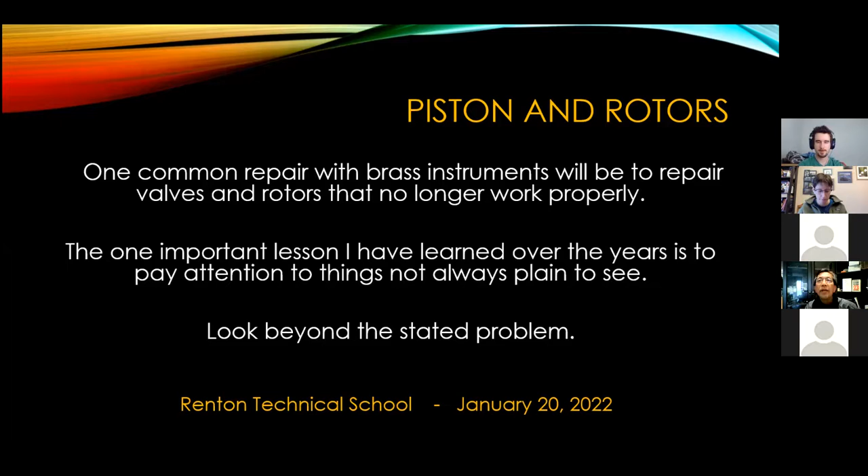Okay, let's start with valves and rotors, specifically valves. If a valve is not working, what are some of the reasons a valve will stop working? You can put that in the chat, or just shout it out. We got casing dents mentioned, not clean, got stuck, foreign object - those are all correct answers.

One thing I know when dealing with valve problems - it's one thing to fix the problem, but you also need to diagnose it where everything is clean, because dirt and everything else hinders your observation about what's going on. So when somebody brings me an instrument and a valve isn't functioning, one of the first things I do is clean that instrument so I can test the piston dry, with no oil. Oil sometimes hides a problem or makes something that hangs up a tiny bit seem to work flawlessly, but if it's dry, you'll feel the drag in the piston. That's why it's important to clean the instrument and check everything out while it's dry.

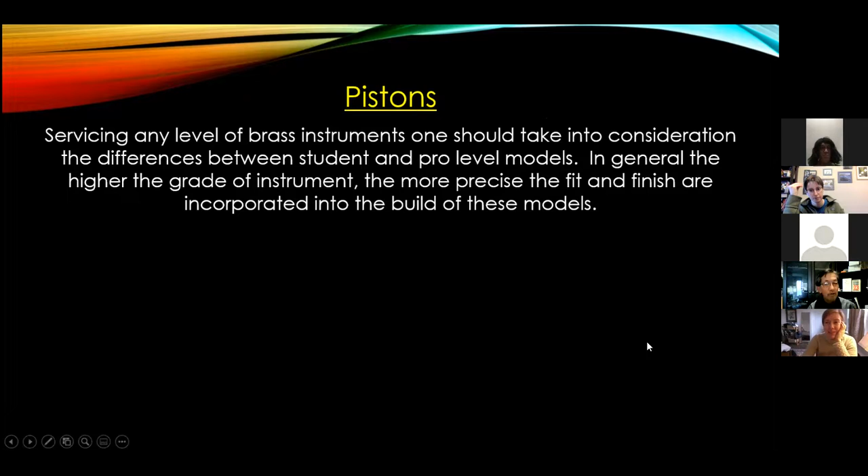Now let's see - do you guys know how much difference there is between the outside diameter of a piston and the inside diameter of the casing it fits into? Anybody want to take a guess? About a thousandth. Perfect, that's exactly right. So what does that mean? 1/1000th of an inch difference. So if this piston is 664 thousandths diameter, the casing is 665.

So basically what that's telling you, the space on either side, or around the piston, is 1/2,000th of an inch. It's not a lot, so it doesn't take much to get a small ding or dent in the casing, or they drop their trumpet and crush the bottom of the threads for the piston to hang up. So that's very little space, and why that's important has to do with how the instrument works.

You would think if you overlapped or made the casing really big, the piston should work even better because there's so much space. But the exact opposite actually happens. If there's too much space, the piston going down is fine, but on its way back it can tilt this tiny bit and then it stutters. So overlapping is not a benefit to you.

Using the right lapping compound is essential, and we'll get into that in a bit. Lapping compounds come in different grits or abrasive sizes. The correct size for, let's say, a professional trumpet is about 1100 grit. Anything coarser is only very slightly too large for that space. I want to use a compound that fits in that 1/2000th of space around the piston. I hope that makes sense.

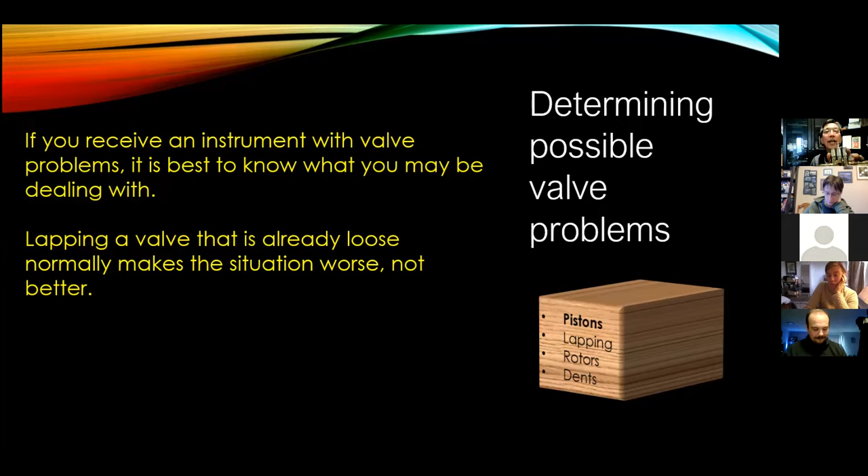So I just want you guys to know that, to save yourself personally some grief from a customer, because nothing's worse—like I said, after you touch it, you inherit everything about that instrument. So it becomes your problem, or your boss's problem.

So know this. This is where, in rebuilding valves over the years—and I sat down one time and counted—most of the valves I rebuilt, and this is not to throw the Bach company under the bus, I probably rebuilt over 650 sets of Bach trumpet valves in the 24 years that I had my shop.

What that involved was either plating the old pistons up and getting them honed, or you can buy oversized pistons from Bach and fit those in, but you need to have the honing equipment and be able to measure everything. So that's where I've come up with this number of 1/1000th and a half.

In doing all this work, the guys that work for me and myself, when we measured everything, if we found things over 1.5 thousandths, it was time for a valve rebuild, because most times the valve was not reliable for the customer. So I hope that makes sense. It's not that much of a difference - we've gone from 1 thousandth to 1 thousandth and a half of clearance. So it's just a tiny bit of wear.

What kind of happens as the player plays, they tend to pull the piston to one side. So the piston gets tilted and the casing gets worn in an oval. If you think of the cylinder, it gets tipped and then gets this oval pattern inside the casing. That condition contributes to the stuttering or the valves going down - they hang up for half a second, then pop up, and for a playing musician, this is a problem.

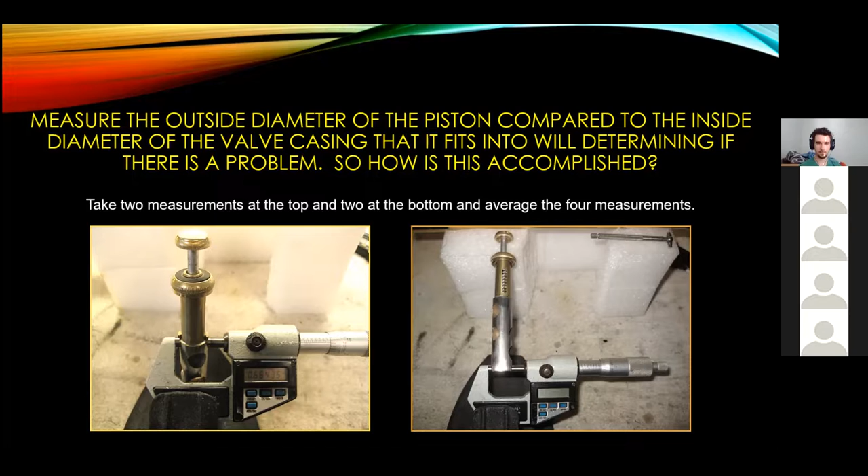Pistons will wear because if you build up debris and things, all the grit that builds up inside of a casing gets embedded into the softer material, held into the softer material, and then starts grinding on the harder material. So the pistons sometimes wear more than the casing.

Does that make sense to you? All that abrasive, all the grit, gets stuck in the soft brass, so it acts like a file or a rasp as this valve is going up and down. All those hard particles are being held in the casing, just grinding the harder material on the piston. So most of the time you get more of the wear on the casing, but pistons definitely wear down too.

Usually, if somebody brings you an instrument that's in that area about 25 to 30 years old, that's where you start seeing a lot of these problems. Not to brag about Yamaha, but in all those years I was rebuilding pistons, I think I rebuilt 3 sets of Yamaha pistons in that same time, and these instruments were just as old. It's only because the Yamaha piston starts out tighter to begin with, so there's a much longer lifespan. It's not like we're doing something superior - we're just starting out tighter.

So you're going to gain a lot more years out of the same age of a piston compared to our good manufacturer competition, Bach. Bach makes good instruments - I'm not trying to say we're doing something better, it's just where you start makes a big difference. So thank you for that question.

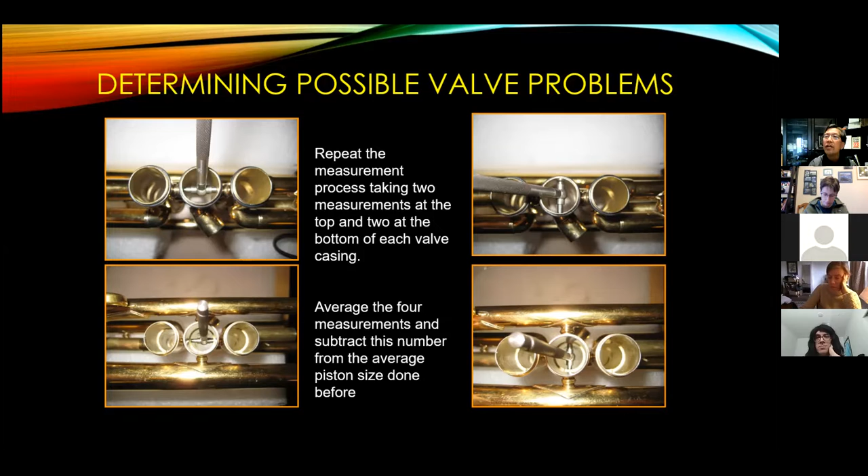And what I do is average all this stuff out. So if I take all my measurements, we're measuring down to the 10 thousandths. Now, you may or may never come across this in your repair life, but if you're working with somebody that's very important and it's critical you get this right, you really need to have the tools.

In this particular example, the difference between the casing and the piston is almost 2 thousandths of an inch clearance. This is a problematic piston that will hang up. When a piston becomes loose, the instrument will still play pretty well, but it doesn't respond as fast and doesn't have as much color. Some guys get used to their instrument being so loose that changing it to something tight again throws their timing off. It takes a player who really knows their instrument a little time to get used to a rebuilt piston.

Unfortunately, it used to be easy to get a set of pistons rebuilt. If you're familiar with Anderson Platers, we used to send pistons there and ask for them to be plated and honed to a specific size, like 665. Anderson stopped doing that about 2.5 years ago, so I don't know where anybody goes now. There are very few shops that can actually rebuild a set of pistons. Osmun Brass out in Boston is one of the only reliable shops I know of, and Steve Winans, Dr. Valve, in the Chicagoland area. Those are about the only two places I know where the work is bulletproof—you can send them there and they'll be done right.

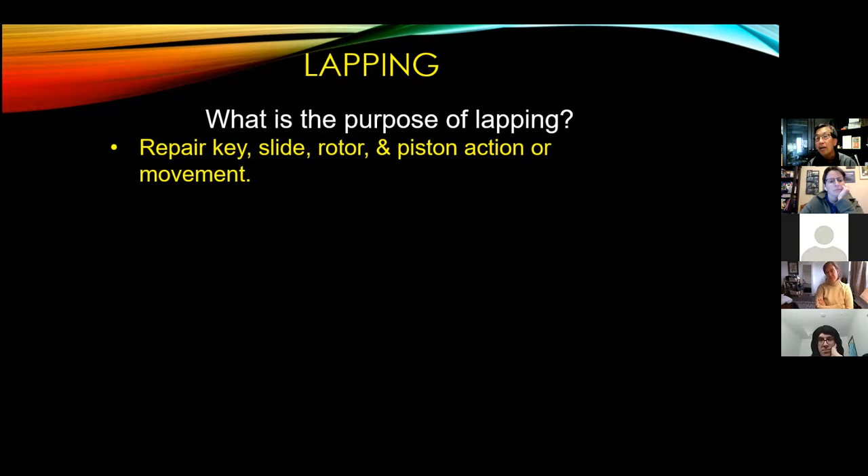I've lapped enough pistons in my life and I still have a lot of garnet lapping compound, so I feel lucky. But I have tried the new stuff and you have less feel about what's going on. That's the thing, knowing that feel as you're lapping - with garnet you knew when you were finished. With the new stuff, you just had to clean it, put it all together, and see if it worked or not.

Okay, purpose of lapping - there were a few things already mentioned, but lapping is a precision tool used to perfect the fitting.

Hey Wayne, I'm sorry, we had a question about silicon carbide, asking if that's glass, if it's like glass.

That I actually do not know the answer to. Silicon carbide, I can tell you this, is used mostly for ferrous metals, steels and things like that. That's where it's used most.

Yeah, that's where I was familiar with it from. I was the one that asked that question. So I was like, isn't that glass type? It's almost like a type of glass. It's very hard and can really eat into things.

Yeah, it is very hard. It doesn't fracture or break down like garnet does, so it stays the same size. With silicon carbide, I think it's to your advantage to use something finer grit than you would normally think to use, because it continues to cut at the same rate no matter how long you're using it, where garnet just kept breaking down into a fine polish.

Silicon carbide - there was one company offering diamond compound, which I just thought was a giant mistake for music. Diamond is unforgiving, it will just cut, and it doesn't give you a margin of safety for yourself in doing valve repair. If you're going to do valve repair, you want to make sure you do a good job and be able to hand back to your customer something that works. You don't want to hand back something where the piston is too loose and it starts to hang up.

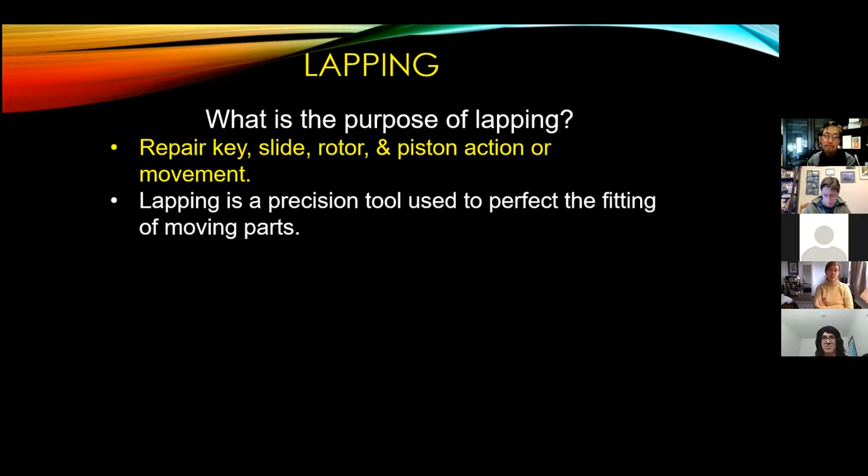One more thing, Wayne - it looks like, I didn't know this, but it looks like Music Medic has a garnet lapping compound available now, which I think is new.

They do have it, and I've tried it. I've been trying to get some information from Kurt, like what's the base. It's one thing to get lapping compound, but the next important thing is being able to clean it out of the instrument. The old garnet and stuff that Hetman products used to sell us, I could clean that out with Dawn dishwashing liquid. So I'm always investigating - okay, this works, but how easy is it to clean this now? Because some of the stuff will get embedded into the metal you're trying to hone, and it's difficult.

You could clean it, put it all together, put some oil on it, and then you pull the piston out, wipe it with a paper towel, and you see all this gray. You haven't got all that abrasive out of there. So I'm still working on Kurt to get more information on that.

So this is, yeah, you're right, this is fairly new with Kurt getting this. And right now I'm investigating another company that used to sell it, but I think they're selling it again - garnet lapping compound. So I'm trying to find out what's going on.

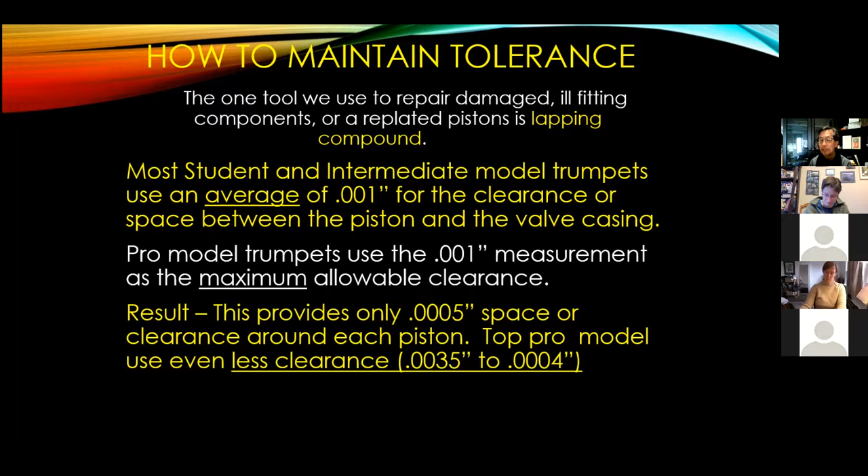A lot of shops you go into, you just don't know what's going to be there until you get there. Sometimes they just hand you a jar of lapping compound and the labels come off, and for all you know it's 700, 600 grit. Yeah, it's going to lap, but it's going to do a lot of material removal at the same time. So just be careful and ask questions about that stuff.

Now, lapping compound - this is from Hetman's products. This is what he suggests for different grits and their purposes. The only thing he didn't take into consideration is, like for Yamaha and Schilkes, how tight our valves are. So I would put our valves at that 11-1200 grit, for final finishing. You guys will have a copy of this.

So there are purposes for all these things. It's no different than sandpaper for wood - you use something coarse to kind of get something close, then get finer and finer to improve the finish or smoothness of the material. Hope that makes sense.

And we've talked about this - trying the problem piston in a good valve casing, and the good piston in the problem casing. So if we discover the piston is the problem, our solution is to put lapping compound on the piston and start lapping. So my question to you is, if this is the problem, why are we lapping this?

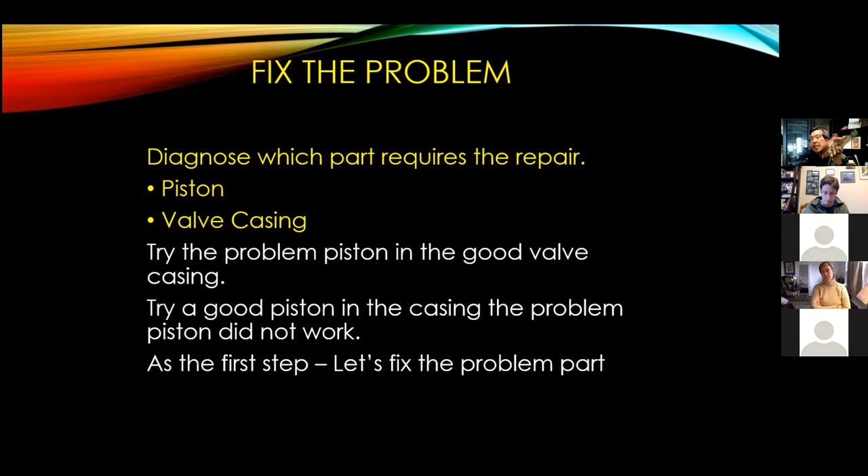I look at this more from a professional standpoint - I'm trying to fix a problem. And if I have to wear something down, I'm going to wear this down. And if this is not the problem, why am I taking material away from a valve casing? So this is where that Ferree's ground sleeve comes in.

If you think about this, these from Ferree's are perfect cylinders, honed right at the correct dimensions. There are no portholes, they're perfectly round. I'm using this as what I'll call a lapping sleeve. I will lap the problem piston in the sleeve, so I know this is perfectly true. I can lap this, and there are a lot of benefits to doing this instead of doing it in the casing.

So if the piston's the problem, let's fix the piston. Our advantages - I target the problem and I'm only taking material away from this. The other thing is I maintain the valve clearance because I'm not taking material away from two different parts. And the biggest thing is, after I get done with this, I just clean the piston. I don't have to clean the casing as well. So from a time standpoint, I'm saving a whole lot of time not cleaning all these materials. Does that make sense?

This is something different - nobody ever taught me this, but in thinking about it, this is the problem, why am I trying to fix or use something that's not broken and not causing the problem? Why am I taking material away from it? So I've come up with this, and it's the same reverse way around.

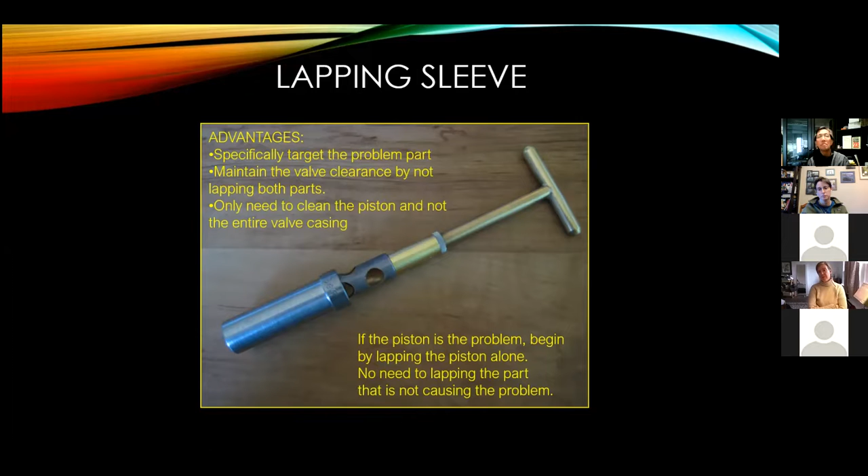So Wayne, somebody did ask what you just covered, which is, can the lapping compound damage the sleeve? Is there a point, you said maybe 500 casings or pistons, but is there anything that can damage that just by lapping? Yeah, I mean for me, I have two of these, same size - one is strictly for dent work and the other is strictly for lapping.

I don't use the same one for both processes, and same with the ground casing sleeve. I have one clean one strictly for lapping, and the other one is for doing dent work. So I have the luxury of having two of everything, or at least for us as a manufacturer, all our pistons are pretty much the same size. So I can afford to have two of these things, but you're right, eventually this does wear.

Yes, no, they're nodding yes. That answers it. I'm sorry? They nodded yes, Wayne. You answered the question.

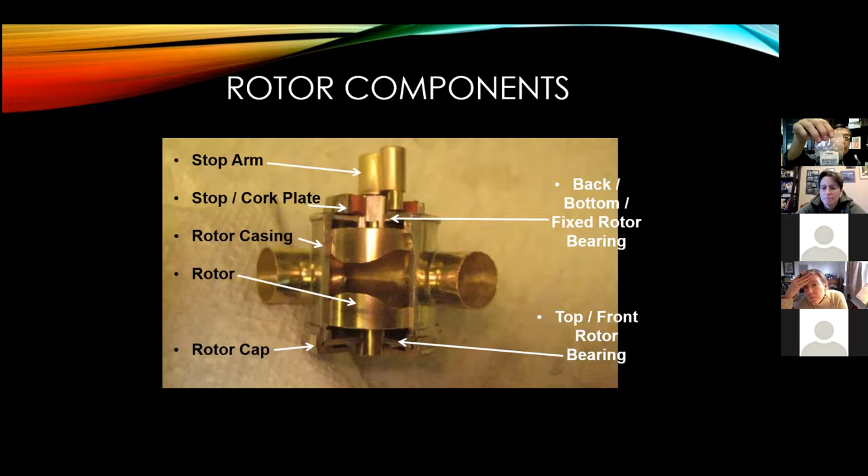One lucky thing about the shop in New York is I don't just work on Yamaha instruments. Myself and my colleague Tomoji Hirokata, who is a world-class woodwind technician, we're the only Yamaha custom shop that actually works on anything and everything. So we see everybody's instruments.

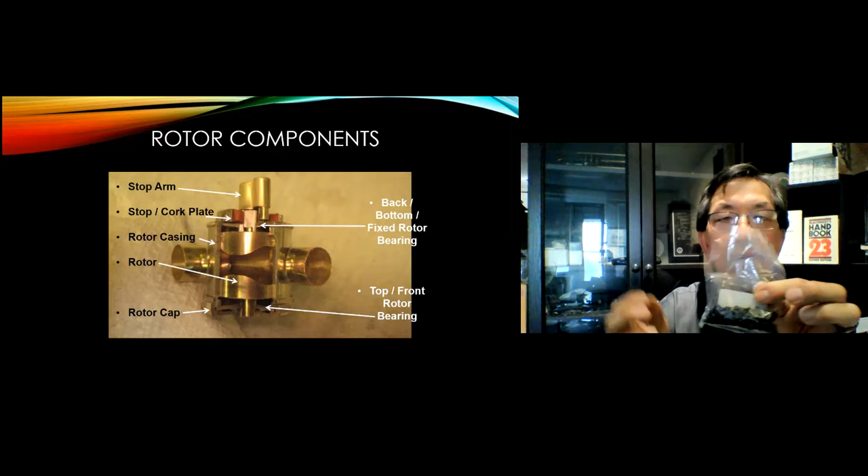This is the only bumper material I use on everything except some large tubas. Whether it's a Conn French horn, a Holton, a Bach trombone, whatever, this bumper material comes pre-cut. The pieces are soft enough that I can almost push them in with my fingernail. They're tough but soft. I've seen this stuff 20 years old and it's not hard as a rock, unlike some Buna rubber products that harden when exposed to certain rotor oils. I don't know if you can see the order number, but this is what I'd tell you to use.

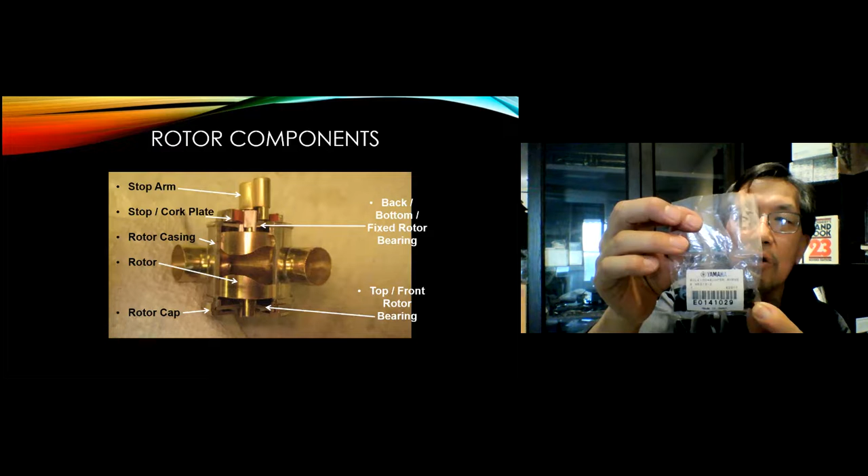It's real easy to work with, and this stuff lasts forever. It saved me trying to figure out tricks to get it installed in the plates themselves.

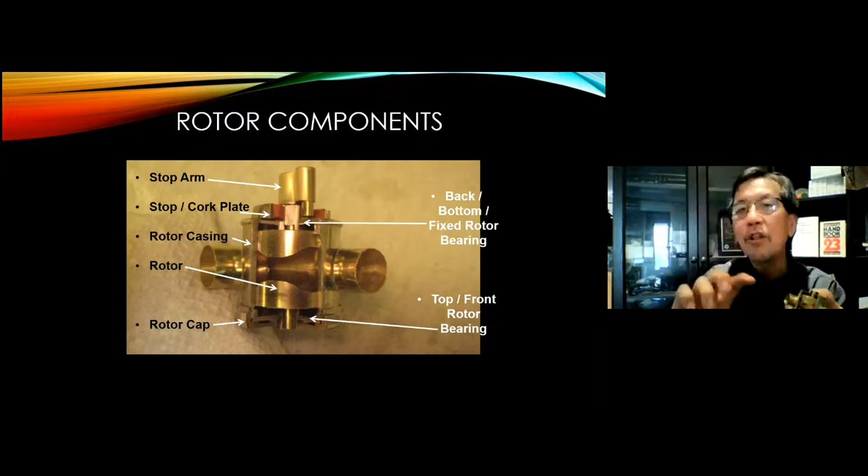Jessica, can I ask you a question? Yeah, I'm here. When you do rotors, what do you guys cover? The reason I'm asking is what I've got in my PowerPoint gets pretty heavy into rotors, covering end play and side play and tightening, and I don't want to start covering stuff that a lot of techs won't even be doing.

So we actually make a tool instead of using a steel punch to get the rotors out, and we made a bearing plate tool. But we go over how to take apart the instrument, how to wash it properly with that special brush to get the rotor casings clean, and how to string rotors, although I do have a mechanical link rotor well soon to be on order.

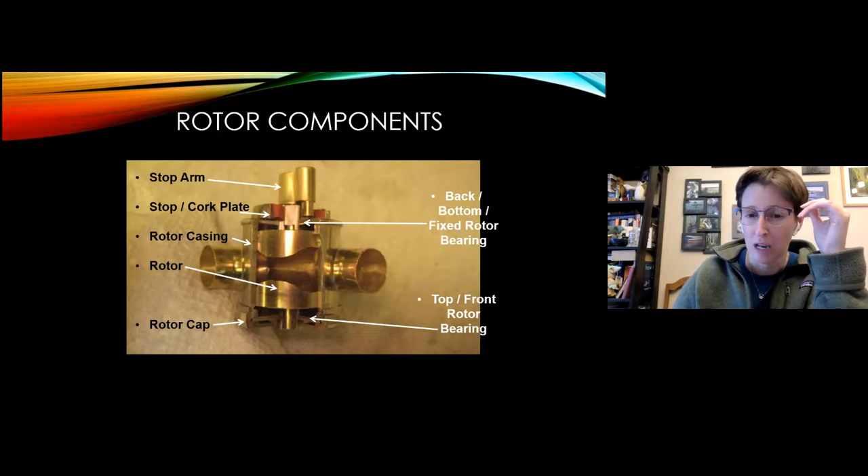Do you ever show how to tighten a bearing? Yeah, we do get into rotor valve fitting. I have a colleague who worked with Orpheo for a while, so he got Orpheo's whole system of how he tightens rotors with collet swedgers around the stem and the top, and also how to alter the bearing plate so it sits in there without any slop. But we don't do that until February, and we might not get into the actual rotor fitting stuff until third quarter depending on how things play out, so we haven't touched a French horn or a rotor yet.

Okay, I'm going to go through this lightly, and if somebody wants to ask questions, please do. What I'm covering is that rotors wear over time, just like a piston wears the casing over time. A rotor wears inside the casing, and I want to show you what wears and where the problems exist.

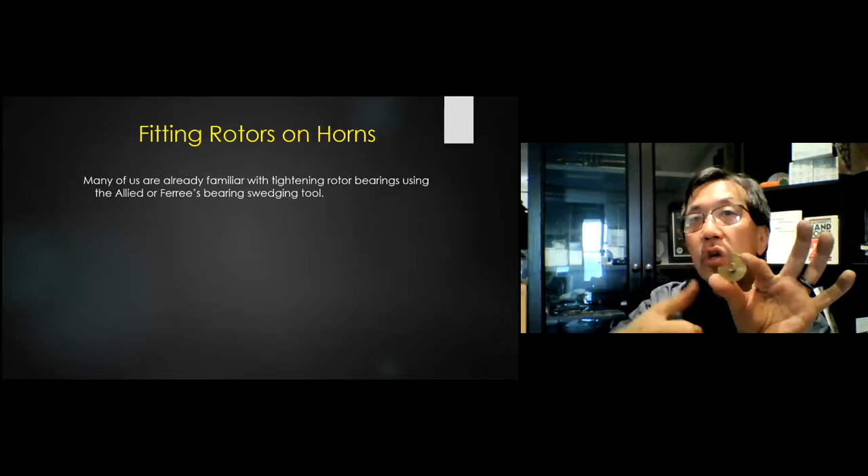Most of you will get familiar with what's called the rotor bearing swedging tool. That's a collet tool. Basically, this part of the bearing gets loose and you swedge it closed, much like swedging a woodwind key where you squeeze it and reduce the center on top of the rotor to get it tight inside there again.

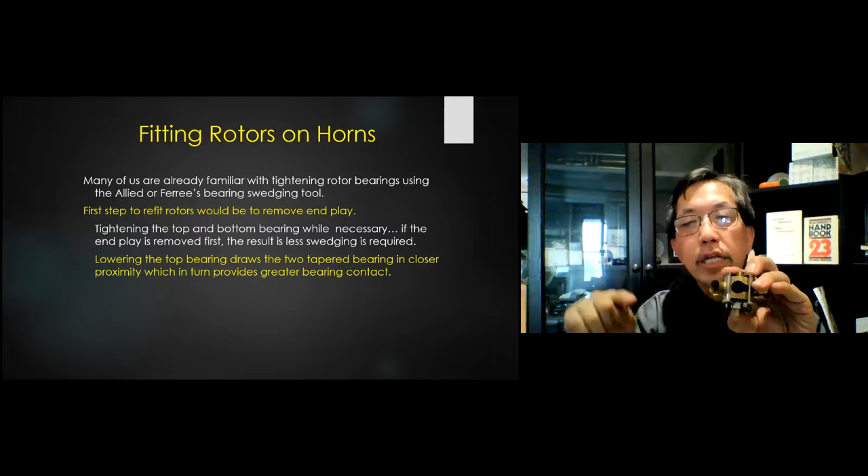My first step is to remove what I'll call end play. Over time, a rotor starts to move up and down, partly because when a lever or string linkage moves the rotor, it tilts it like this, so the hole gets worn in an oval pattern. This is the reason we have to tighten.

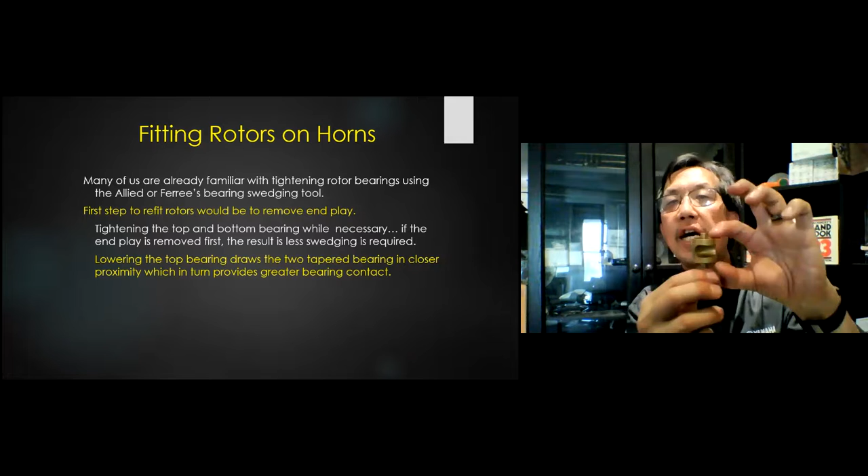Also, a rotor has a bearing surface on each end, and over time those wear so the rotor can actually start to move up and down. I think it's more important that we remove this end play.

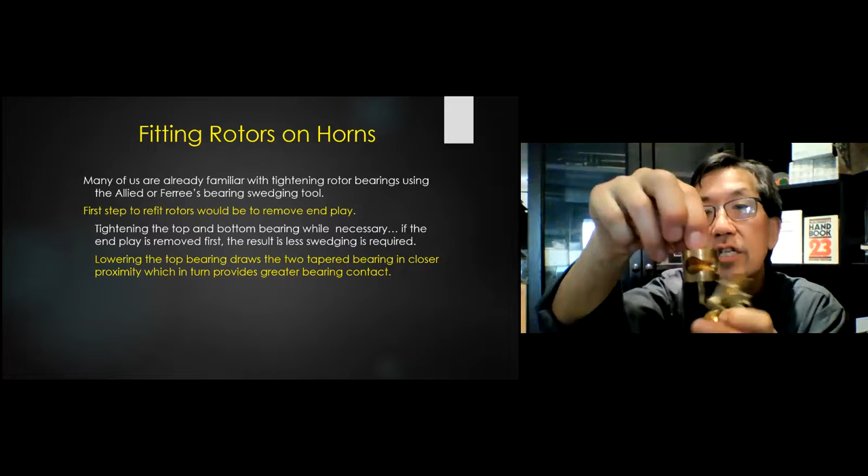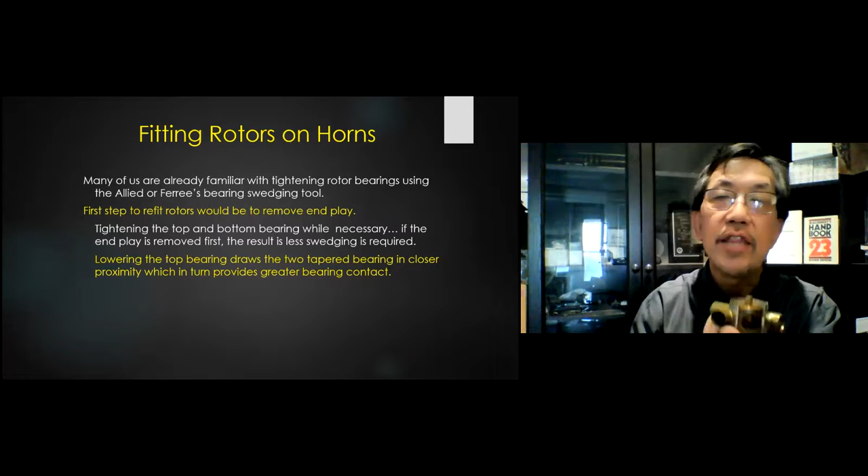One thing you might not know is that most rotors, or just about all of them except for Texas Conn 8Ds, are tapered on the outside rather than a perfect cylinder. So the casing is tapered also. When this fits, if the rotor can move up and down, the two tapers move away from each other and create a big gap where the rotor leaks air in the closed position. That's why I'm talking in this PowerPoint about removing up and down play.

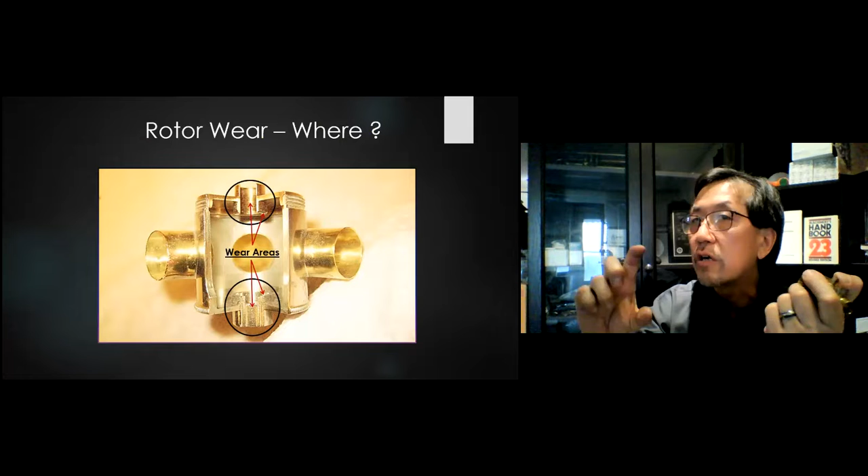So hang on a second, here's a rotor. These are two spots where we get quite a bit of wear, because this is where the spindle on each end of the rotor spins. Naturally, this is where you're going to get wear. You'll also get wear on the inside ends on both sides - that's where you get that up and down play. Now, how I approach this is a little bit different.

Let's see. The spindle itself and the bearing - wow, I should do this better. The spindle and what it fits into down here are also tapered.

Now, in this picture, you see where I have that black circle. If I surface that, meaning take the material away, it allows this rotor to drop down a little bit more, so this taper fits better into the taper that's in the bearing below. I hope that makes sense.

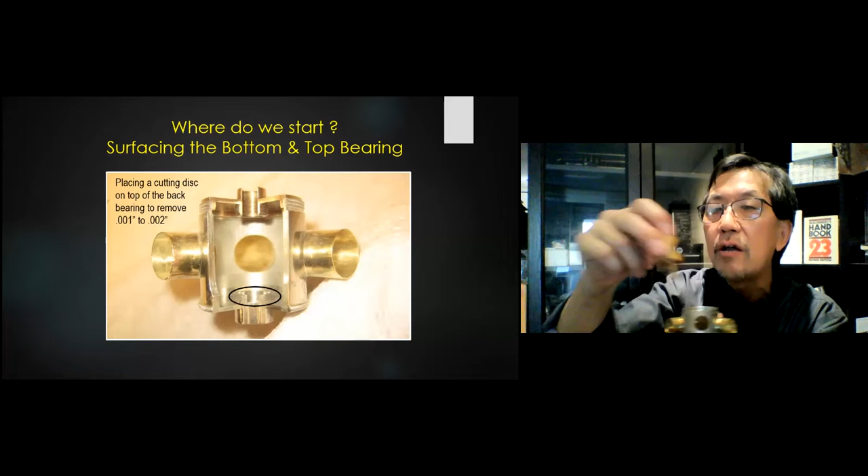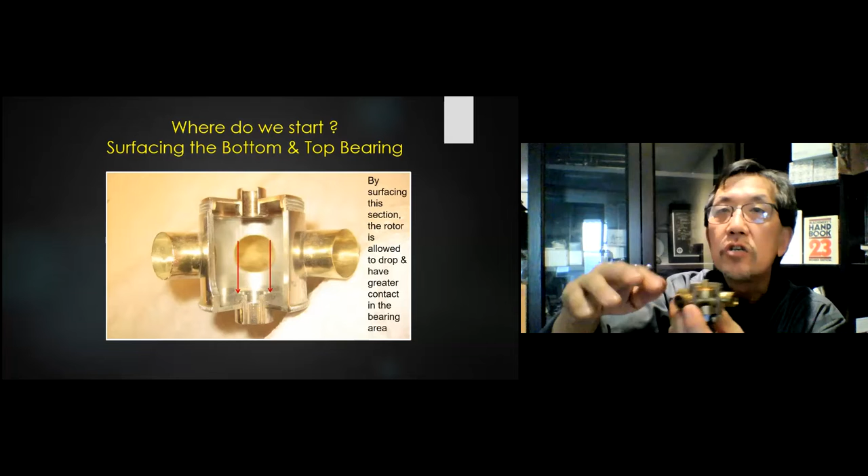I don't know too many guys who do rotor repairs that actually do this, but I am surfacing that part of the rotor casing to allow the rotor to drop down, to get this taper to fit better in the taper that's in the bearing below. I'm talking about maybe a thousandth of an inch, a thousandth and a half. It's enough to return the tightness of those two tapers.

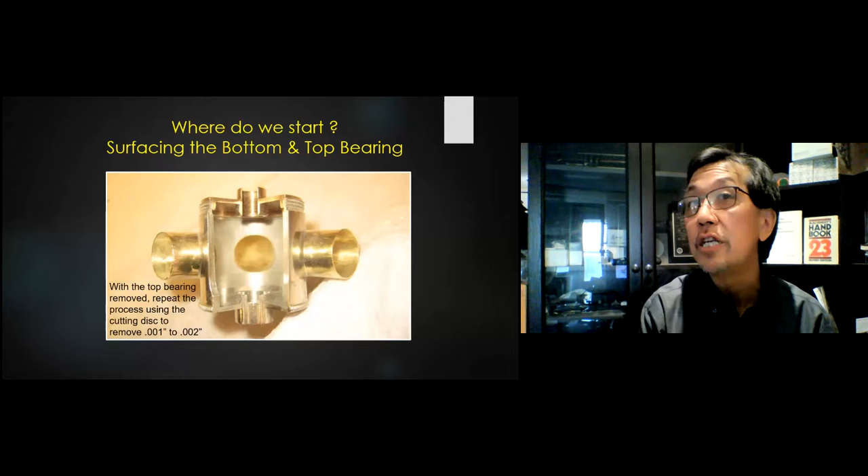Now let's see, right here, removing a thousandth to two thousandths - it's not a lot. You need some specialty tools that you can buy. I think JL Smith makes a flute tone hole leveling disc for the Trill Key tone holes. You can use that to basically surface the bottom of that rotor casing bearing top spot, which allows the rotor to drop down and tighten the taper.

Yes. There was a question about the general ratio of tapers - 1 in X ratio of tapers. What do you mean? I'm not sure what it means.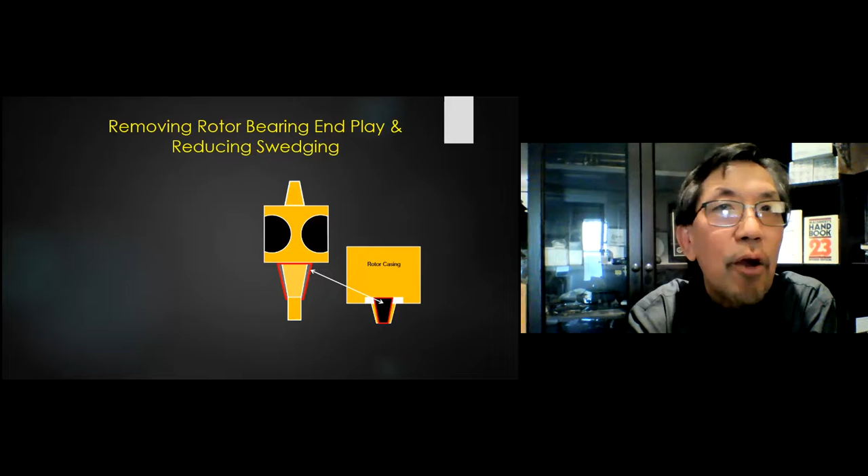Sophia, would you like to? Well, a lot of times when I see tapers, they're listed as 1 in X, like a 1 in 14 taper, which would obviously be narrower or shallower than a different ratio. All the different manufacturers have their own unique proprietary shape, so there's not a single answer to your question. Does that make sense? Yep, our standard lack of standardization - they do not use the same taper. Some are even proprietary and don't really align to anything on anybody's chart. So I know that's not really answering your question, but that's the reality of what every manufacturer does. Some of it's unique to the instrument itself, so they've just come up with their own version of things. I hope that answers your question. Pretty much - it's kind of like the only thing that's standard around here is the complete lack of standardization.

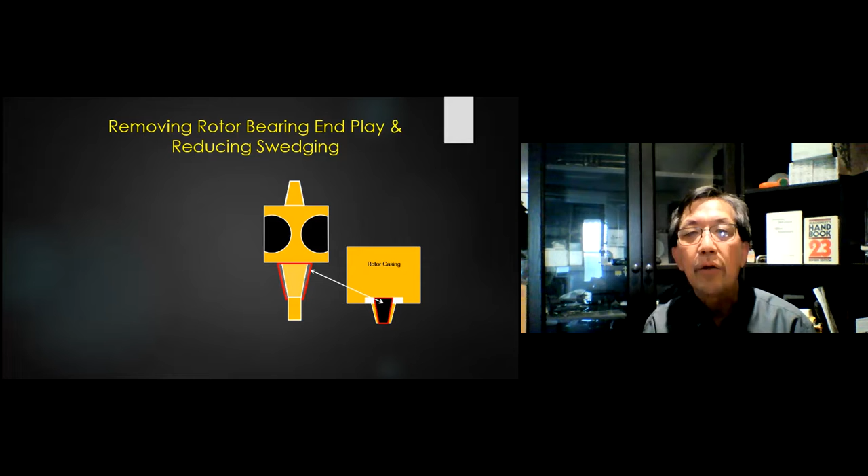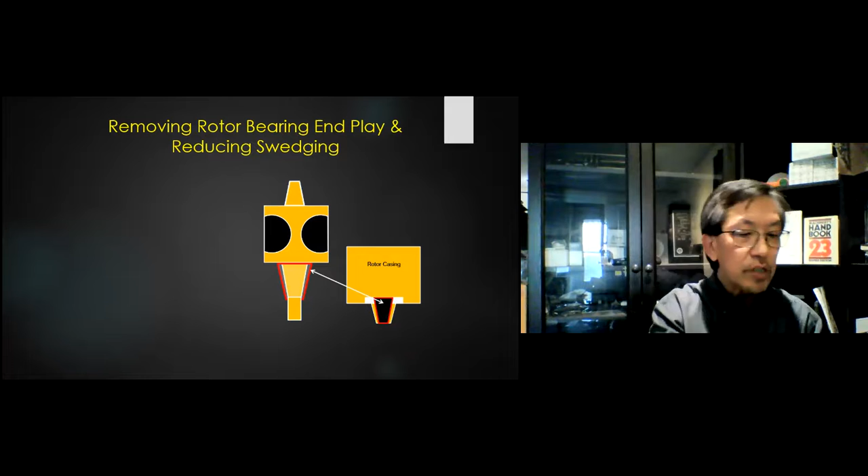What I'm showing in this diagram, the picture of the rotor with that red outline, is showing the bearing surface and how much space there is. It represents what's in the bottom of the rotor casing, what I call the bottom bearing. This removable one I call the top bearing. Different manufacturers have different names for either end, but the fixed bearing I call the bottom. When the bottom one wears, I show you why I lap this one surface - where that blue line is, that's what I'm surfacing. If I remove a thousandth, a thousandth and a half, or two thousandths, it allows the rotor to drop in and this taper to become tighter. I hope this visualization helps explain why I'm doing this.

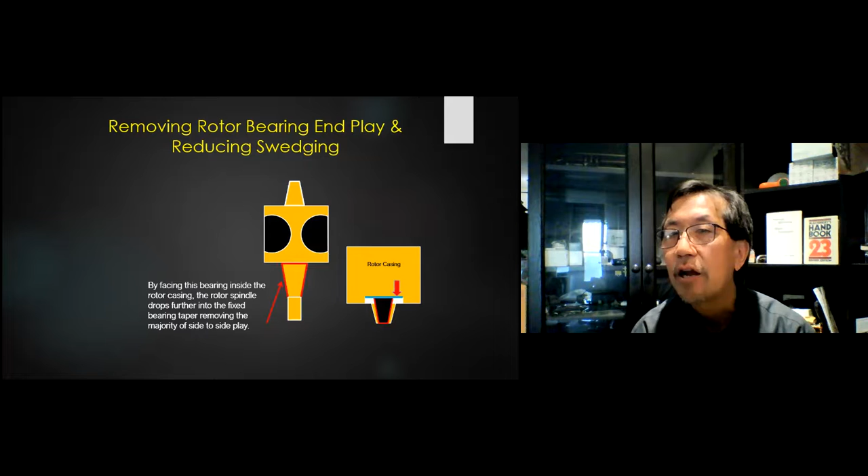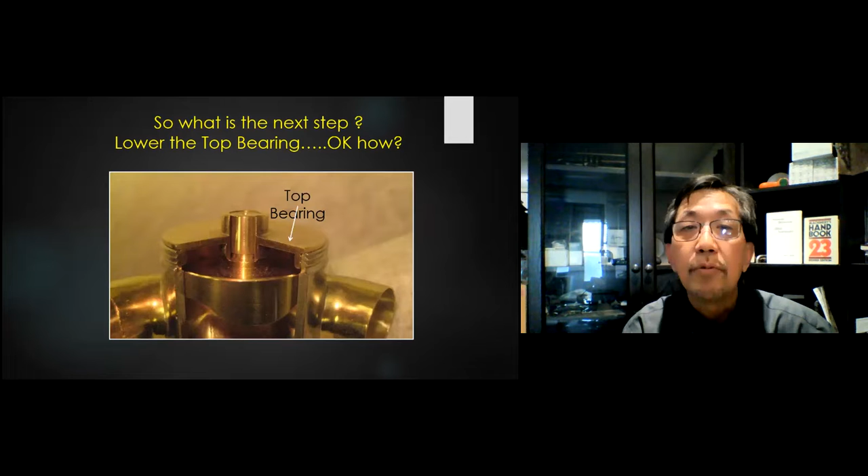So that takes care of the bottom bearing. For the top bearing, to get that closer, I'm going to machine or abrade the top of the rotor casing. You can either put the bearing in a lathe and machine the underside of the top bearing, but you need a decent lathe that'll spin that rotor bearing concentrically. That's the problem - a lot of shops have decent lathes, but getting something to spin concentrically that was made on a different machine isn't always possible. I hope that makes sense.

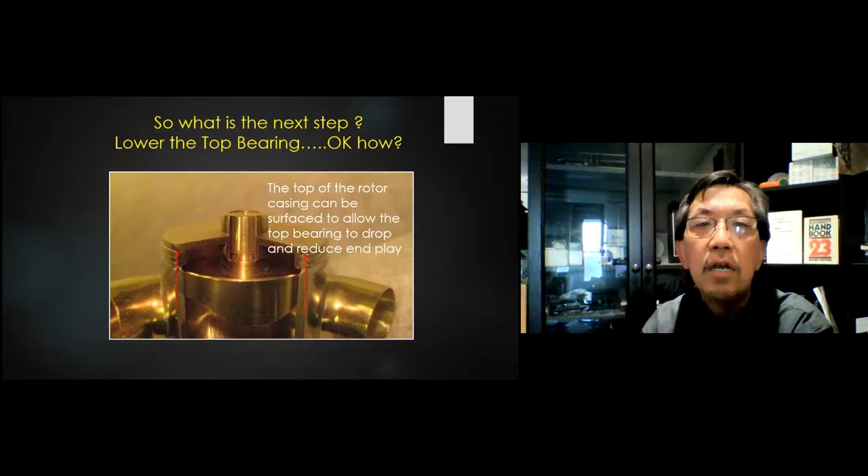So the easier thing to do is take a thousandth off the top of the rotor casing. This can be surfaced to allow the top bearing to drop, which helps reduce the end play. There are plenty of rotary sax tone hole tools that will do this job - Ferree's, JL Smith, everybody's selling these discs to surface tone holes. You can use the same type of tool with one of the pilots to take a tiny bit off the casing itself.

So in doing that, I can drop down. Now, I don't know if Ed Kraus still sells this tool. Mr. Kraus has gotten out of selling a lot of different things. This tool only existed because I asked him to make this, so if he still sells it, I am unclear. I don't think he does. He's really trying to pare back on tools, and if he does, he has like one set left, but I really don't think he does. He's really trying to just focus on pads and bumper material and stuff like that. As a substitute, any of the sax tone hole tools that you find, you can use those, as long as you have some kind of pilot to keep the abrasives centered in the rotor casing.

Wayne, we have a lathe question. Sophia, can you go ahead and unmute and ask your question? Yeah.

So if you got a 4-jaw chuck for your lathe, shouldn't you be able to set it up to turn concentrically if you're using a 4-jaw independent? Because I know 3-jaw automatic self-centering chucks rarely ever center. I got a lot of experience and background using these things, so I immediately thought 4-jaw chuck, you can. Yes, if you have a 4-jaw chuck and a dial indicator, you could dial this in to spin dead center. Not many shops are going to have a 4-jaw chuck, even if they have a lathe. I will put that out there. Oh, okay. Yeah, I mean, it's either that or there are 6-jaw chucks where the entire chuck can be adjusted. It's kind of like that 4-chuck idea, but instead of moving the jaw, you're moving the entire chuck. And I used to have a small 6-jaw on my small Logan lathe that I could dial anything in to be dead center. So yeah.

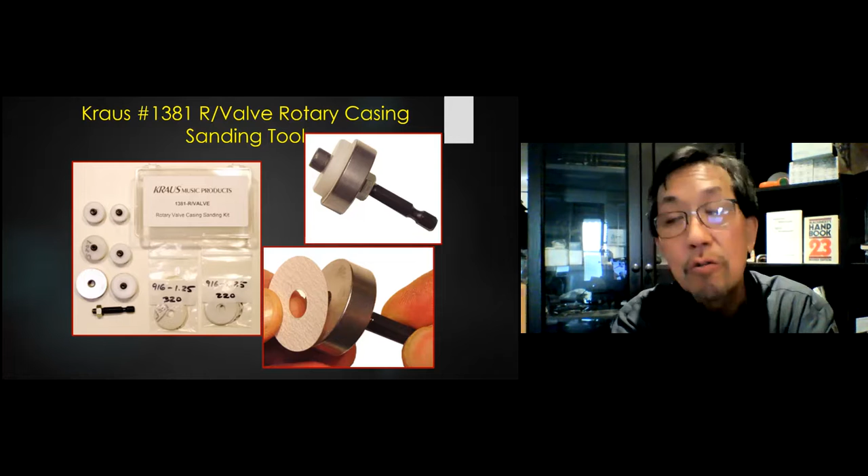Hey, I don't mean to cut in here, but I can't have this meeting go till 2 because I have to jump to another meeting at like 1:45. Okay, so we have not gotten any French horn stuff as far as this goes. I'm not trying to rush, just saying if we could maybe get out of this and move this along a lot faster and get into dent land. Sorry, everybody. Okay, thank you.

All right. Before we get into dents, do you guys want to take a short break? Do anything you'd like. I'm good, straight on, just keep going.

All right, I'm going to try to make this quick. Thank you guys for hanging in there, we've been here a while. I'll try to make this quick. A lot of the things I'm going to talk about with dent work is what I'm calling unconventional dent removal. I'm sure you guys have had your share of putting dent rods, dent balls, all these different tools to remove dents. I'm going to show you a few different things, or different ways of thinking about things.

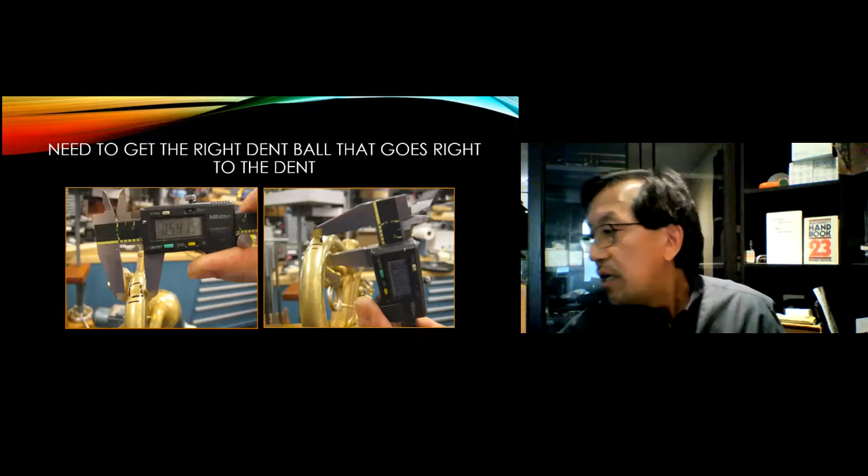All right, how do we figure out how to pick the dent ball that's going to go right there without going through 5, 6, 7 different dent balls? Okay. The way I would do this is measuring. Now, there's a way to do this by measuring. In this example, you can see I'm measuring the crook of a trumpet bell. One direction, it's 541 and almost 542. The other direction, it's 510. There's this huge difference here.

Like 30 thousandths of an inch. And why is that? Whenever you bend something, this direction gets more narrow than this direction, or the diameter gets wider in the bend. It's a natural occurrence - even if you fill it, it's hard to get a perfect cylindrical bend. This is a normal example of when a bell is bent, there could be this much difference. It's not a perfect cylinder. That's why sometimes when you're taking dents out of the crook of the bell, you're tapping and feel like you're right on the dent ball, then you get to the side and you're not. This is one of the reasons - it's wider one way than the other.

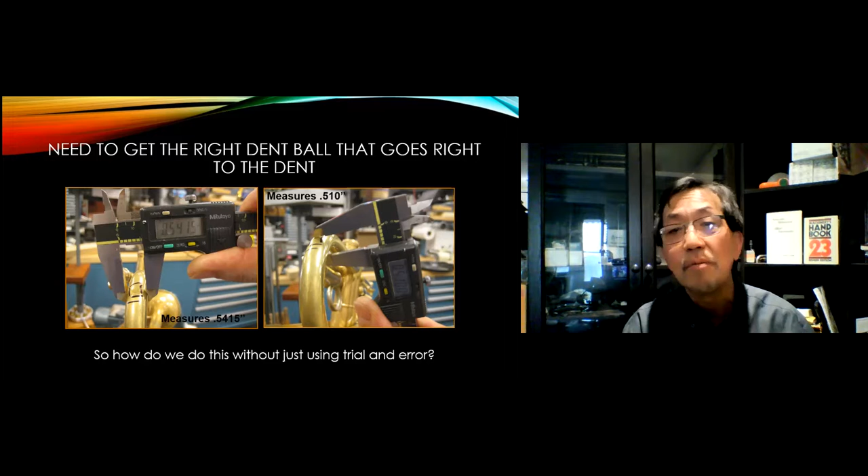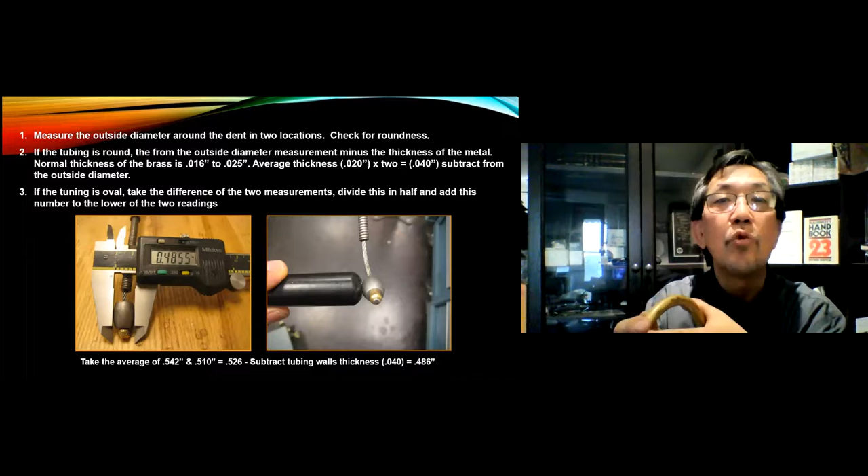But the reason we're measuring this becomes clearer in a second. 541, 510 - so we got a difference of about 30 thousandths of an inch. If we measure the diameter and average it out, we come to about 525. Now what do I do with that number? The thickness of metal used in brass instruments is somewhere between 16 to 25 thousandths. So how does that help me? If I know the outside diameter and minus two thicknesses - a thickness on either side of the dent ball - I can pretty much guess, within one dent ball, the right one that'll go right under that dent I'm targeting. So if our average is around 525, I'll average the thickness at about 20 thousandths.

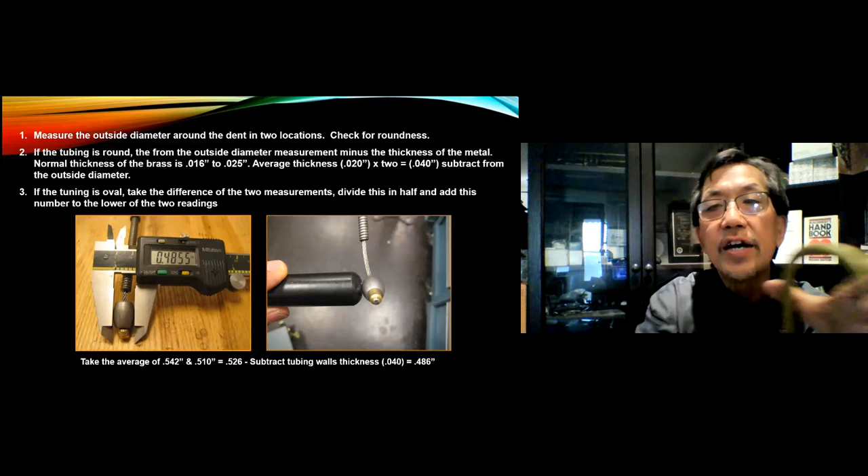So if there's two sides to that, I'll minus 40 from that diameter I measured. So I come up with 485 here. Now that dent ball should go right under that dent without you guessing. You'll either be right underneath the dent or within one dent ball of it. So this is one way to figure out how to get the right dent ball exactly under that pesky little dent.

Okay, I'm going to interrupt you, Wayne. To the students - I've been in this industry since 2008, and this is the first time I've heard this. You want to write this down and put it in your back pocket, because this would have saved me an incredible amount of time throughout my entire career. This might be my favorite piece of information I've received in a long time.

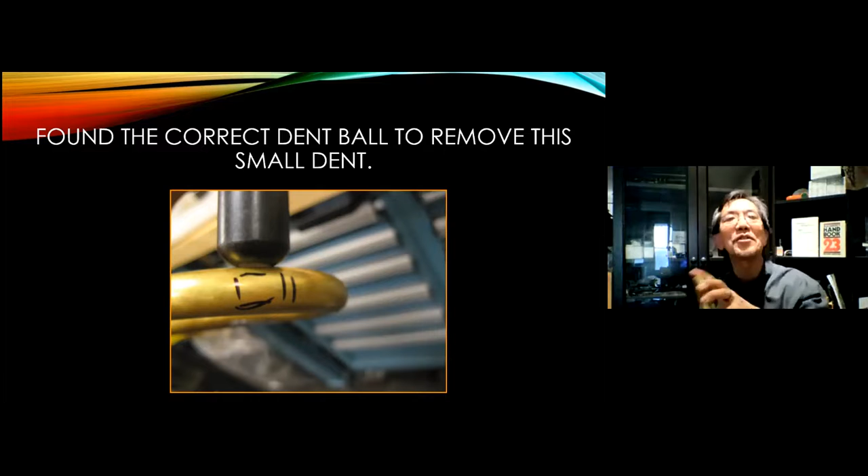This is one of those things - I was just sitting there one day with a pesky customer and a brand new instrument, trying to do as little as possible, not to create more work, or put as few things inside the instrument, because this person was very particular about everything. So I sat down and figured this out, thinking, wait a minute, I know the average thickness of the metal - can I use this information? I sat down and figured this out, and I was surprised that the first time off, I actually picked the dent ball that went right underneath the dent.

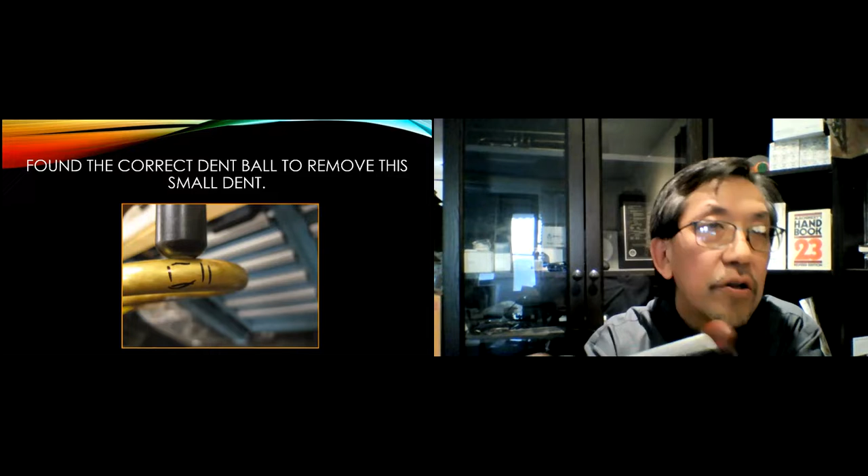Now, in saying all that, are you guys familiar with all my dent hammers? I have them coated with something - this hard red plastic that Ed Krause used to sell. It's a plastic or ultra high molecular weight sheet that's self-adhesive, that Votaw, I think, still sells. All my hammers - I do not use a plain steel hammer. I do not like Delrin hammers. I never have - I don't think there's enough weight to impact a dent properly. But I've had this same red plastic on the hammer for the last 5 years. It hasn't come off. You can hit as hard as you want and never leave a hammer mark. So on silver, on brass, whatever, I can do all this work and you don't get any hammer marks. That's part of how I avoid leaving marks, because my goal is to make it look like I was never there. That's hard sometimes, depending on the dent.

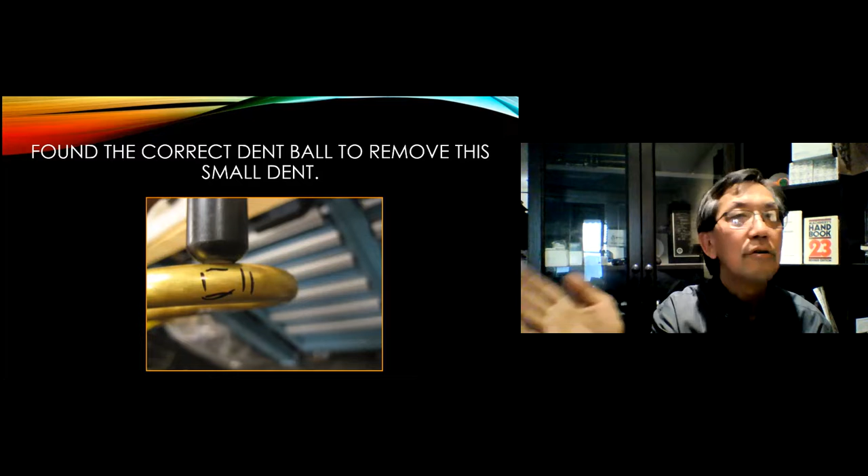But figuring this out helps with dents here, and the other instrument I really don't like working on for taking out dents is flugelhorns. Flugelhorn branches and bells have a constant taper, so you get one dent ball that goes right where you want it, and the next one goes way past where you need it. So you have to get very creative sometimes to figure out how to get a dent ball exactly where you need it.

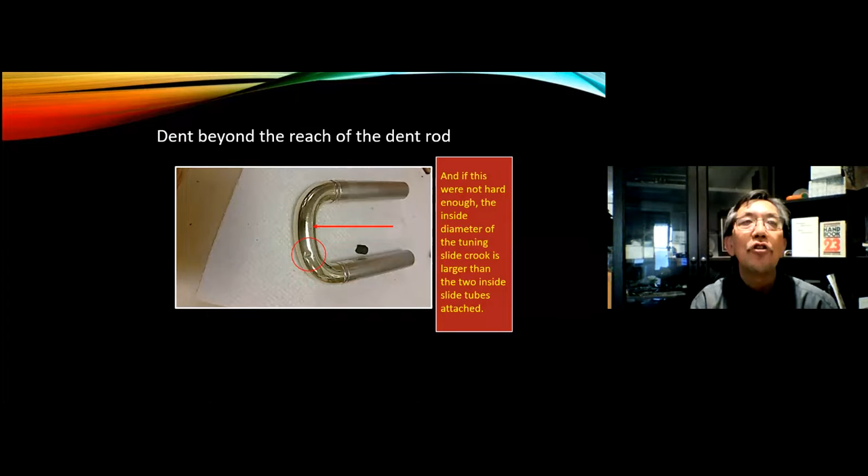Okay, moving on. Here, this seems simple enough, but no dent rod reaches this. So what are our choices? The customer wants this dent out. Well, our only choice is to take this apart. Or do we? And to make this worse, if you put a dent ball in the tubes, the crook inside diameter is actually larger than the tubes attached to it. So you can only get so big of a dent ball in there.

All right, here's my solution. Basically, you can put the largest dent ball that you have inside there, with a magnet, a rare earth magnet inside this tube. If the ball is loose enough and you can get underneath the dent, you tap this, and even though the ball is loose, that tap makes the ball drop away and then pop back to the magnet. So every time you tap, the ball is going away, coming back, and hammering back up at you. You can take that dent out this way, using a ball that's actually a dent ball that's too small.

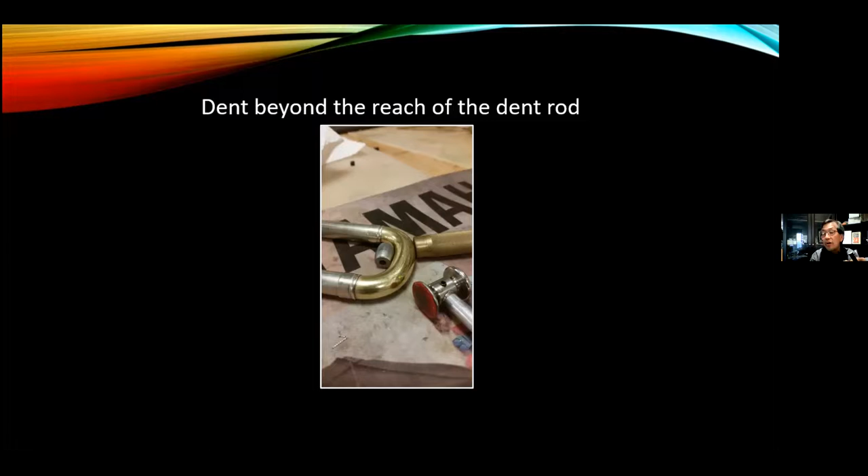So here I am with my tool, tapping on this, and that's the end result. I got the dent out.

Now, what I'll tell you is this sounds easy, but it is painfully slow. You'll be tapping and think you're doing absolutely nothing, or maybe even doing more damage. You'll be tapping going, man, nothing's happening. But if you do it long enough, you'll start to see the dent come out and get smoother and smoother. Then you learn to move the magnet back and forth, covering more of an area as you're tapping. But you can take that dent out without having to take it apart. I got the dent out.

It comes really handy on a lot of the large tubas that have really soft crooks. You can take out a whole lot of stuff that you cannot reach with a dent rod.

This was the customer's French horn, and they wanted it, they were actually waiting. I said, well, give me a few minutes here. It took me about 15 minutes to take that tiny dent out using a magnet and a dent ball inside.

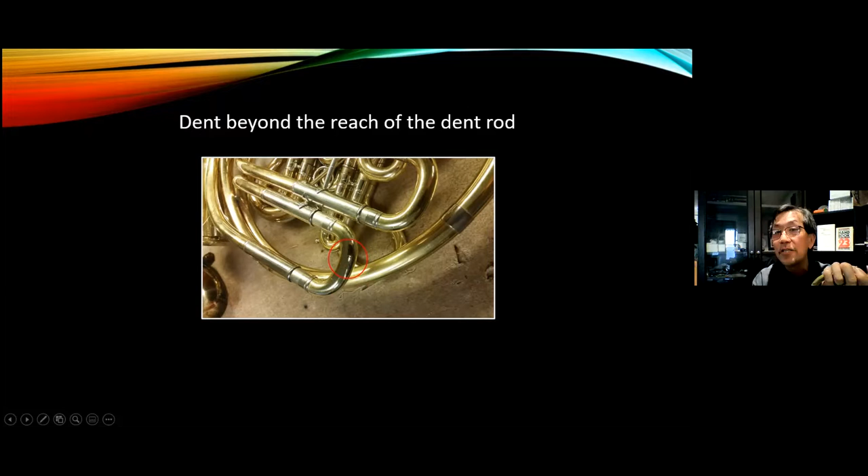Let me show you another example. This is a euphonium. There's no way you can get a knuckle tool or a dent rod to this dent. Same thing, I found the largest dent ball that would fit in there, attracted it with my magnet, tapped on it, and got the dent out.

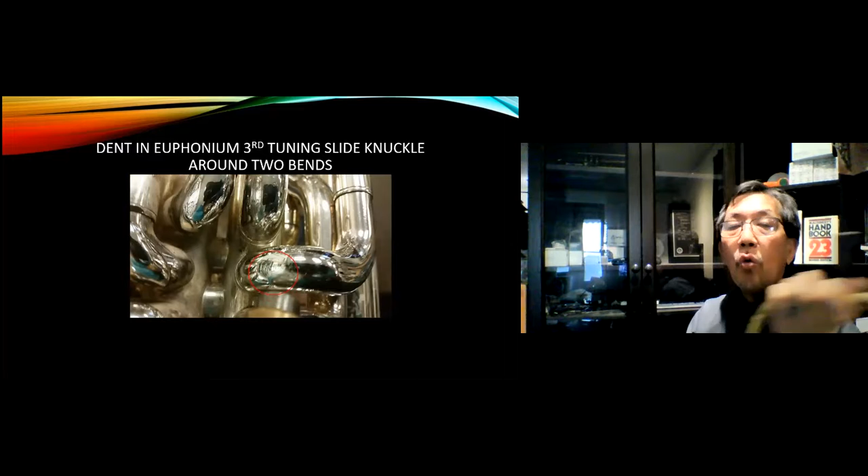One thing I'd suggest: wherever the dent is, take a Sharpie and mark a line, center one direction, center the other direction, on the outside where you're holding the magnet. That way you have an idea that your magnet is right over the center. So draw yourself a couple witness lines to make sure your magnet is in the right place. But you can take dents out this way — it is really painfully slow in how it reacts and how the dent comes out. It's very slow.

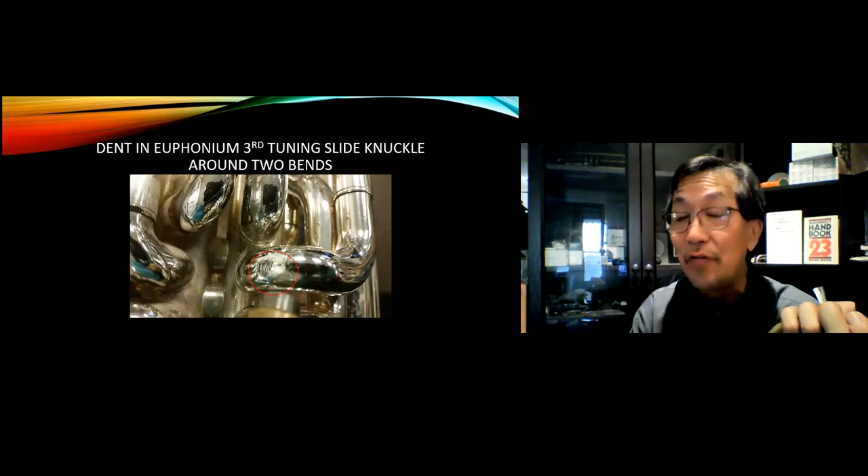All right, here's a couple of examples of some really bad dents. You can insert your joke about the trumpet playing flat here. I think a guy thought he zipped up his triple gig bag, threw it over his shoulder, and launched his trumpet across the room.

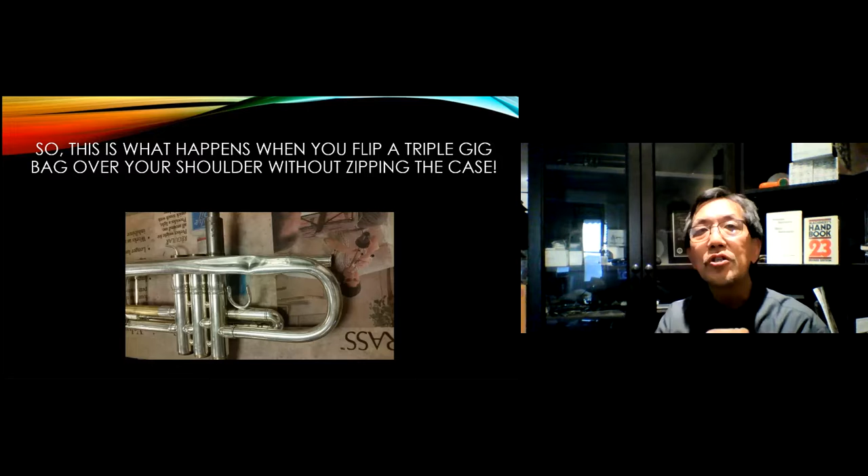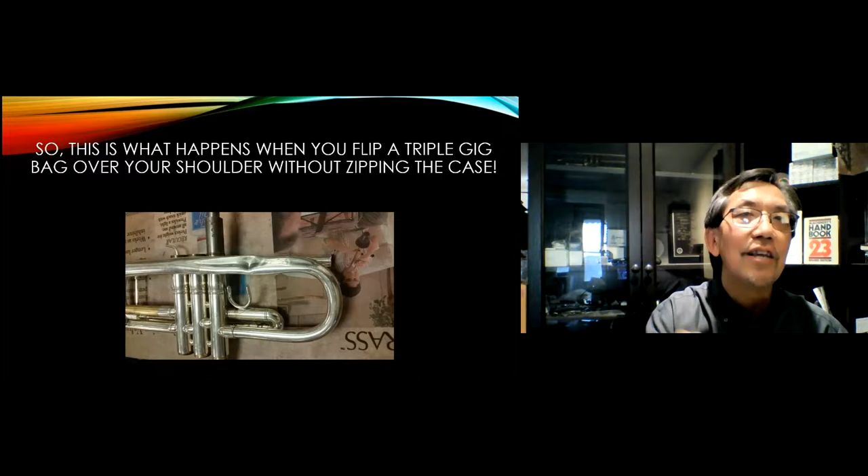So what do we do to take this dent out? Most techs will try to find a very skinny dent rod, shove it in there, and try pushing this dent up. What normally happens is, wherever the tightest spot is, you get this terrible stretch bulge from the dent rod. Now you've got another little ugly thing you have to figure out how to clean up. Is there a better way to do this? Is there a tool that could help us out with opening this up?

Come on — a tapered rod. Now, I've already explained, if you push a tapered rod in there, you'll get this terrible bulge where the tip of the rod hits the narrowest point.

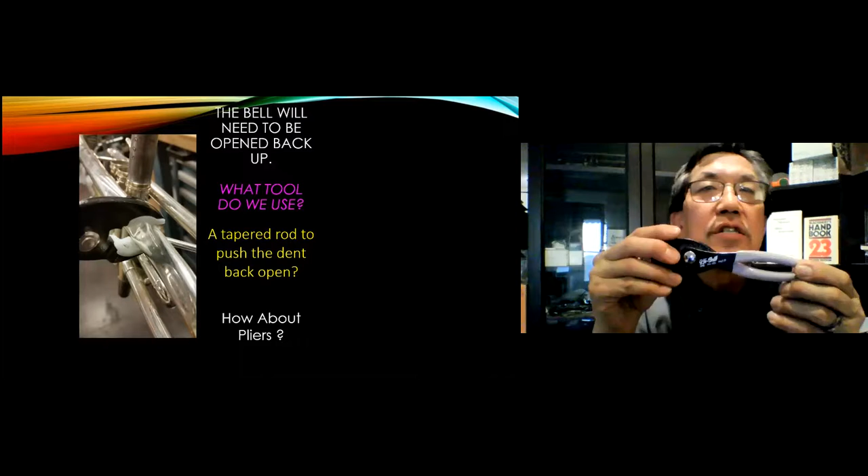How about a set of pliers? Believe it or not. Are you guys familiar with these pliers with the nylon jaws? I have them, haven't shown the students them yet. Where do you source those? Just go to Amazon, type in PH165, you'll see them for $14.95.

Okay, if you can see these pliers, let me talk about these first. What these are great for — say you're replacing a lead pipe on a trumpet and the S braces got really bent up, you want to be able to straighten it without ever leaving a plier mark. These are your pliers.

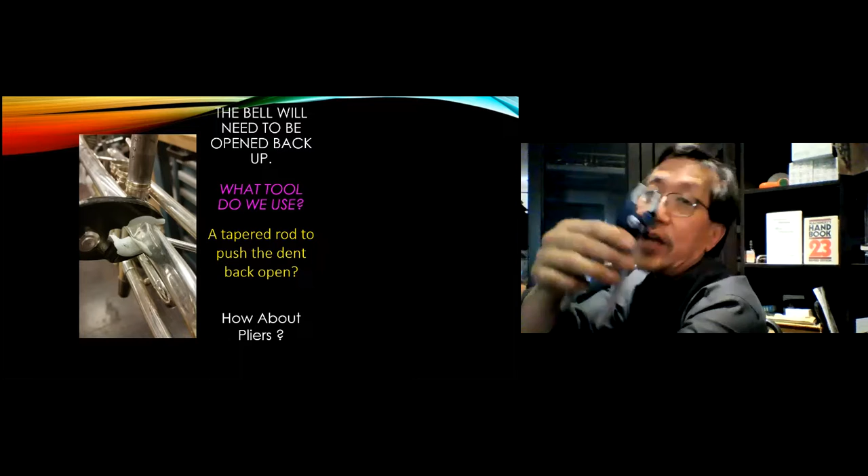Straightening out woodwind keys, the lever got bent. You can grab this thing as hard as you want, straighten things out, and never leave plier marks. They're big enough that if you have a stuck rotor cap, you can grab it, loosen the rotor cap, and not leave a mark.

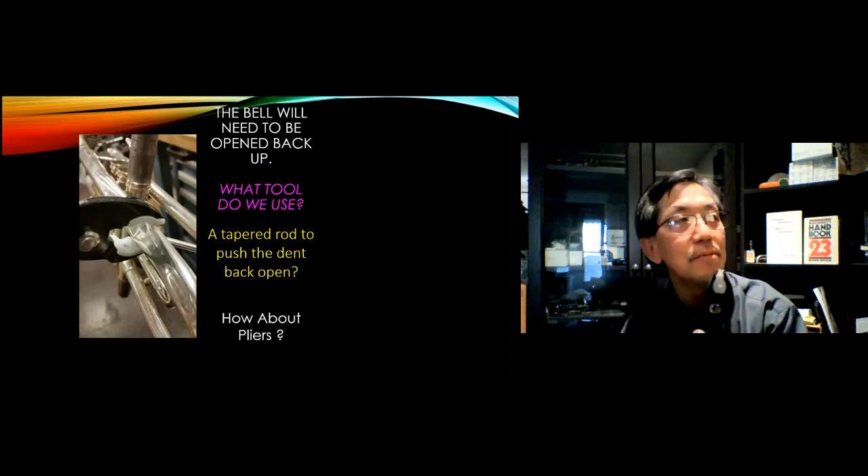So if you don't have these, I think this is a good investment. Half of you are probably on Amazon right now placing orders. I've had guys actually on their phone order them during my clinic. If you're smart, you'll also order the replaceable jaws, because these nylon jaws have a screw that holds them on and they can be replaced too. So these are great pliers. They'll allow you to do a lot of things and nobody will know that you used something, you're not leaving marks. That's the important point.

In this particular instance, what I am doing is at the widest point, I'm just taking the pliers, and you have to be very careful. The widest point, I'm just doing light squeezes. And I can take where it widened out and start squeezing that back, and you will see the roundness start to come back. Now, the other thing is...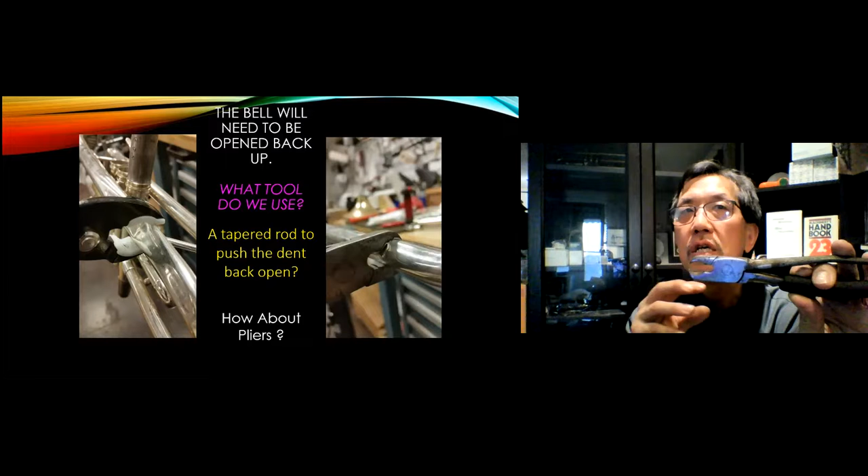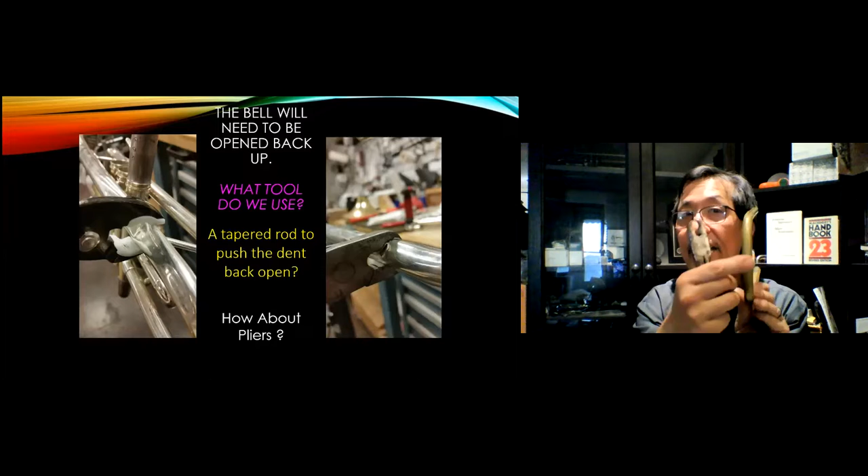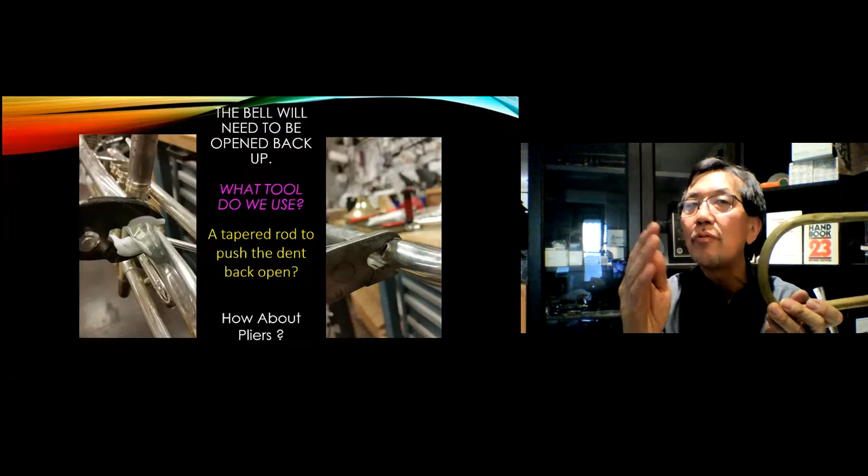Allied sells these pliers. They look like giant swedging pliers for basically brass tubing. If you were to expand a trumpet tuning slide and let's say you accidentally went too far—who does that ever happen to—you can actually swedge the tubes back down. But these pliers I have lined with the UHMW, the Teflon sheet. Both sides are lined with that. And if something gets really dented, the sides will go out wide. I can take the wide side and slightly squeeze them back, and you'll see where it got really crushed, it starts to open up without you even putting a dent ball in there. So I hope that makes sense.

Another example of the pliers: if you look at this trumpet bell crook on the right, there's a dent. And what always happens when you get a dent back here, the sides go out wider. So if you look right above the dent, it's 530, and right on the dent, it's 19 thousandths bigger.

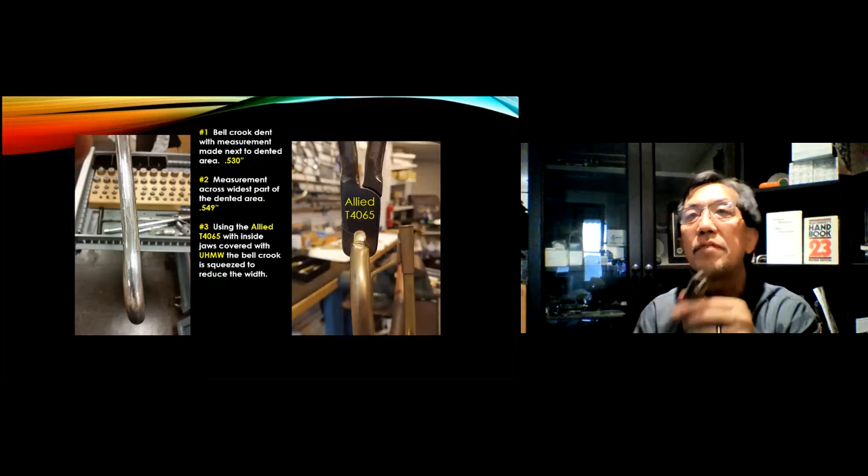There it is, T4065. If I take my Teflon lined pliers, rather than just start shoving dent balls in there, I'm going to very lightly squeeze this back down, measure, squeeze, measure. And I went from 549, whatever it was, down to 533. So I almost got it back to round. Now the dent is actually easier to take out. So that's by just using this.

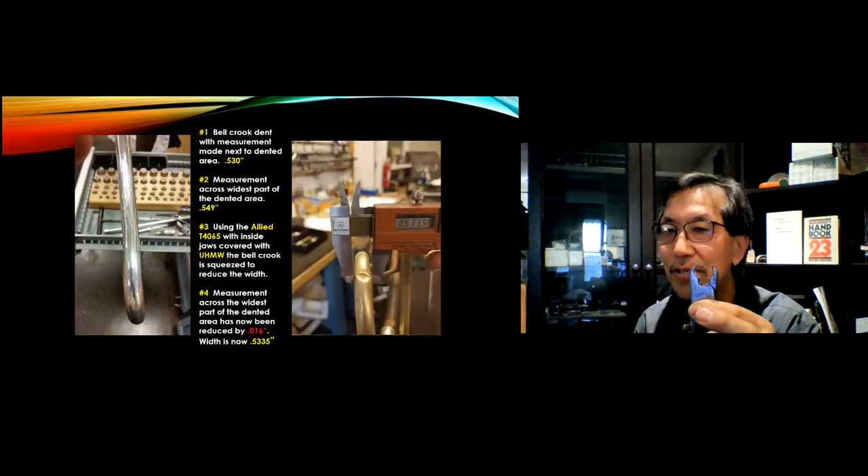If you ever decide to use this, be careful, do it slow, very light squeezes, because as much as you can do good work, it's very possible to do some very ugly things with these. Just like magnetic dent work, you can do good and you can do evil with the same tool. So it's all in your hands. Does that make sense? Anybody have any questions about that?

These are just small things to make the dent work come out better, because otherwise you're relying on a dent ball to actually lift the dent up and bring the sides back in. If I bring the sides back in, it's easier to get the right dent ball size in there, and the dent will come out actually better.

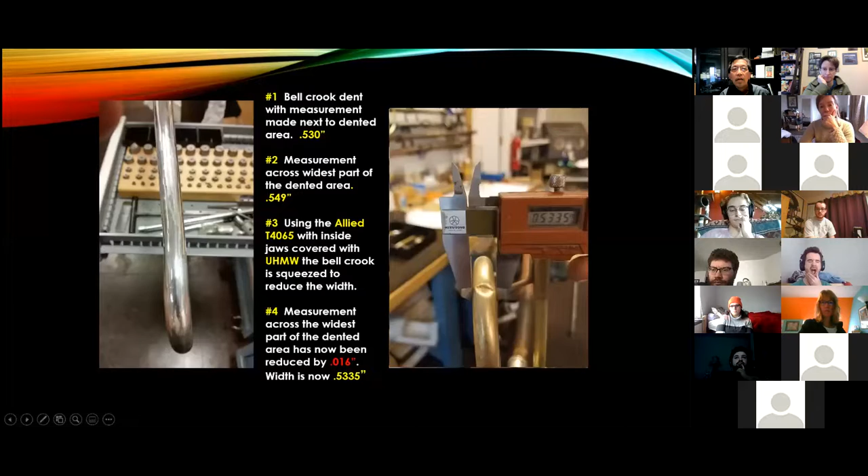Sorry, I forgot, the player does not want me to remove the front brace. He does not want me to unsolder it, believe it or not. Normally I would just unsolder the brace and go at this thing. But this guy was a big artist, and all right, I like a challenge. So what do we do here?

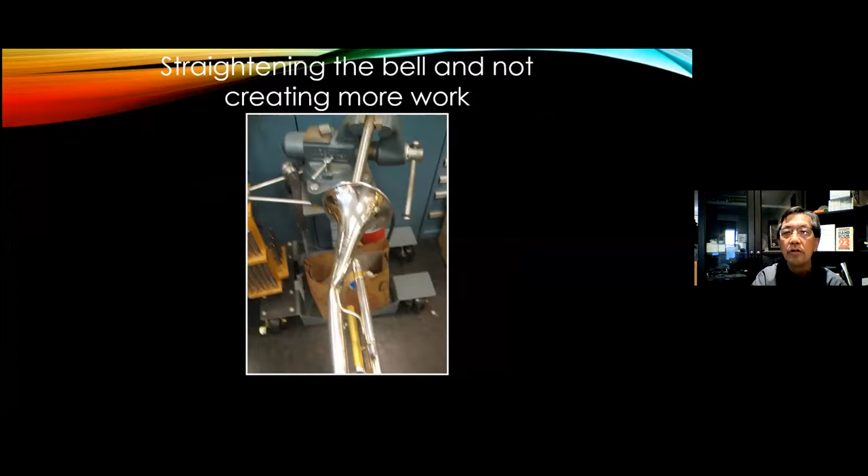Okay, it first enters, getting a little straighter. Once I got that dent, or the tip of it, past the dent, now I can just rotate the trumpet around that dent rod and round that out, instead of pushing the narrowest dent rod I could, making more marks.

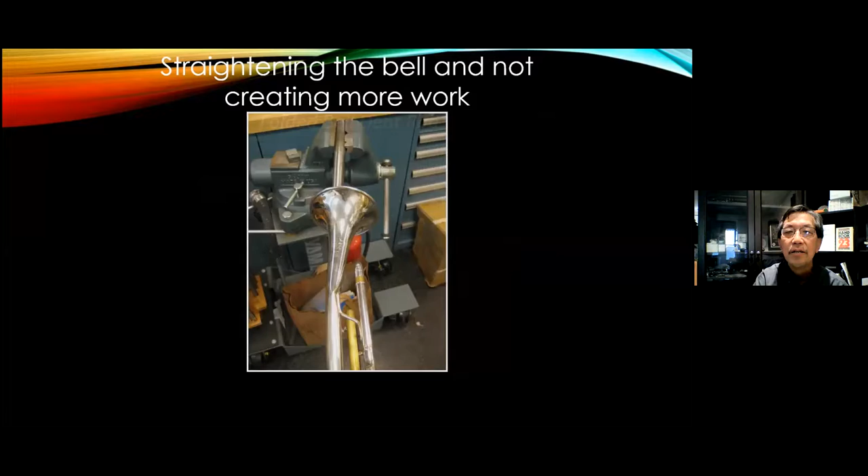This is just using that same dent rod, and now I'm just pushing the bell back against the rod. And that's where I ended up, just using that dent rod to open that up. It's a big difference from where I started, and didn't do additional damage.

You could kind of do this with a straight burnisher to open that up. Once you get the tip of this past the deepest part of the dent, just rotate the bell very slowly on the burnisher. It will sweep open that closed spot a little bit. Does that make sense to you guys? Because you will get ugly stuff like this.

All right, this is my finished product without unsoldering the brace. A lot of that was done with, let's see, do I even have it? Here it is, I have a small plate burnisher.

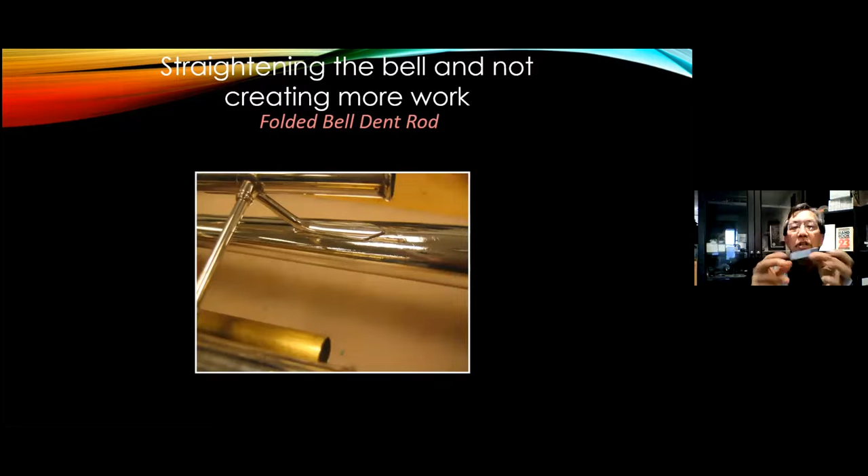It has UHMW on one side. So what I'm doing with this little tool is I'm putting this edge against the side of the brace and tapping around it with a full-size dent rod inside there. And that's how I got the dents out around the brace, by using this.

You know, to try to hammer something perfectly next to a brace without hitting the brace is impossible. But having this little metal plate with UHMW, you can hit as hard as you want and not leave a mark.

So that's the finished product. Yeah, there's some stretch marks and stuff, but I didn't create new stretch marks to get this thing back open.

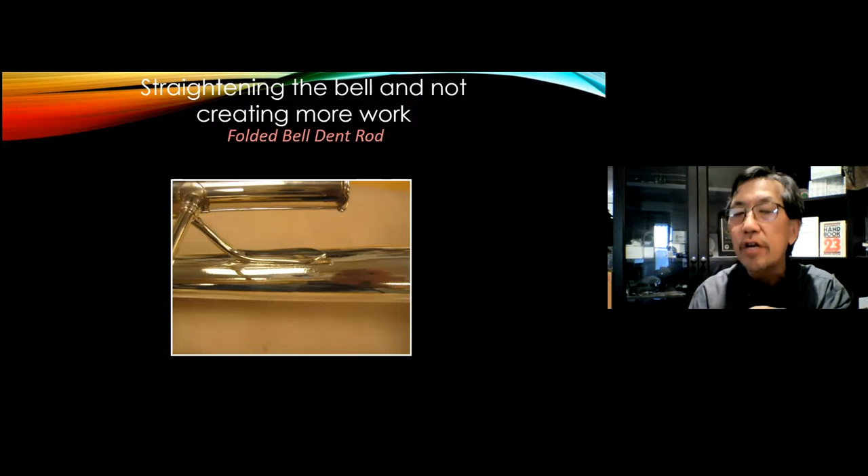So another angle of that. And if you look towards the point of the brace, you can see the original stretch marks. Whenever you get a dent, it stretches the metal. So you have this extra layer of metal, or more surface area of the metal, because it got stretched in the dent. But there's ways to kind of feather that back in.

I still never found out why the player never wanted me to unsolder the brace. Something very superstitious with taking the instrument apart. I don't know, maybe he thought there was something magical about it, but I got it done.

So that's where I started. That's where I ended up. So these are just little things to address dents that just seem impossible.

Here's one. This is a Schilke piccolo trumpet. There's the dent. This guy, same thing, was freaked out in the sense that he did not want anybody taking the instrument apart. It was a special gift from somebody, and why that made a difference, I don't know.

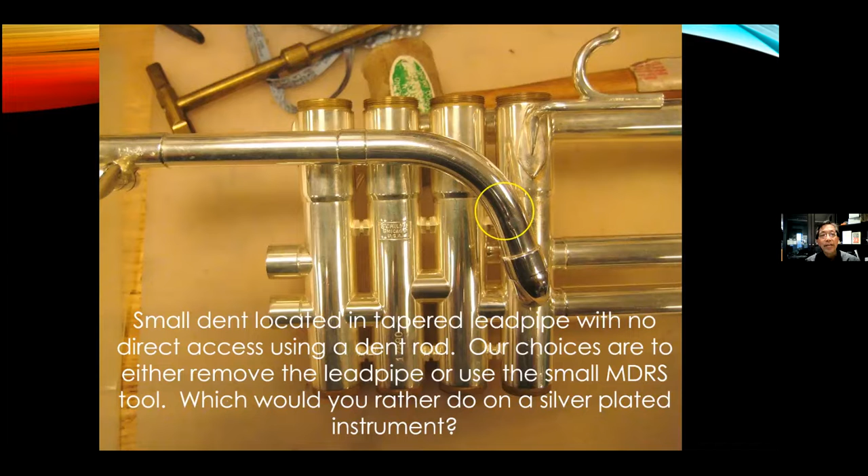But he had already asked about a half a dozen techs, can you get this dent out? That curved tube is actually tapered, so there's no way to get a dent rod in, and you can't reach it with a knuckle tool.

So this is where the magnet comes into play again. Here's a little bit better picture of that. So same thing with the magnet: get the largest dent ball you can, put it in there, and you just start tapping.

And that's the finished product. I got the dent out without taking this apart.

Again, painfully, I mean painfully slow in how it reacts. It takes a long time for that dent to come up, but it will come up.

Wayne: are we talking 20 minutes or 2 hours? What's that? Are we talking as far as painfully long time? Are you talking about 20 minutes, or maybe 2 hours of just tapping? Response: 20 minutes. Because, you know, if we had a dent rod that we could get to it, we'd have that out in less than 30 seconds. So for something to go longer than a couple minutes, it feels like forever.

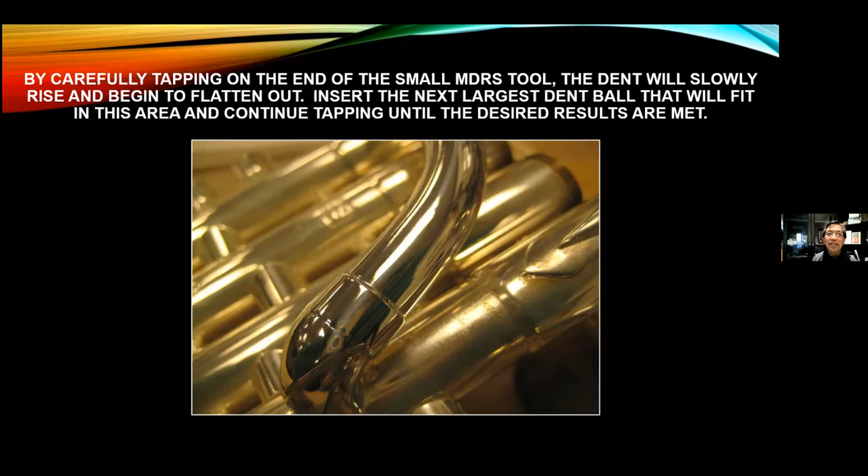Okay, a little bit better view of that. So other places: trumpet bell crooks, euphonium knuckles, taper branches. There's tons of places to use this.

I just wanted to let you know, this just doesn't happen as quickly as our normal methods of taking dents out. That's the only reason I say it's slow. So it takes a lot of patience. A lot of times you're hitting the magnet so hard, you get the feeling you're going to be flattening more stuff, but it doesn't really happen. I can't really explain it, but I've done this enough and I'm always surprised at the results.

Okay, now that pretty much ends this part. Do you guys, or ends the clinic, do you guys have any questions?